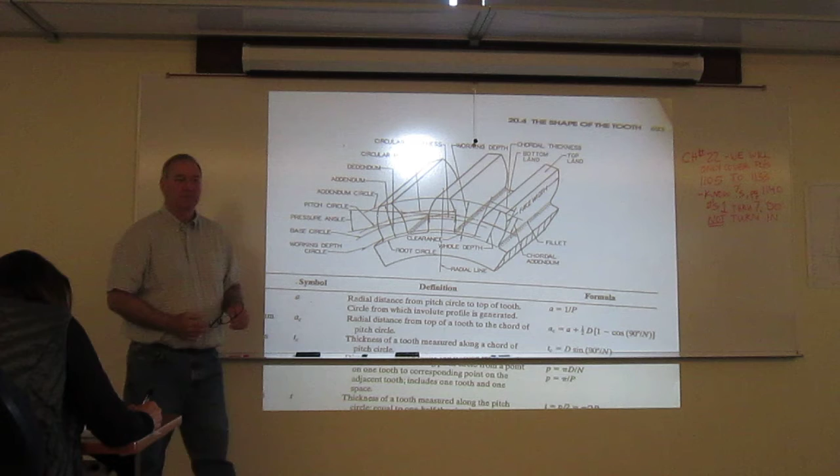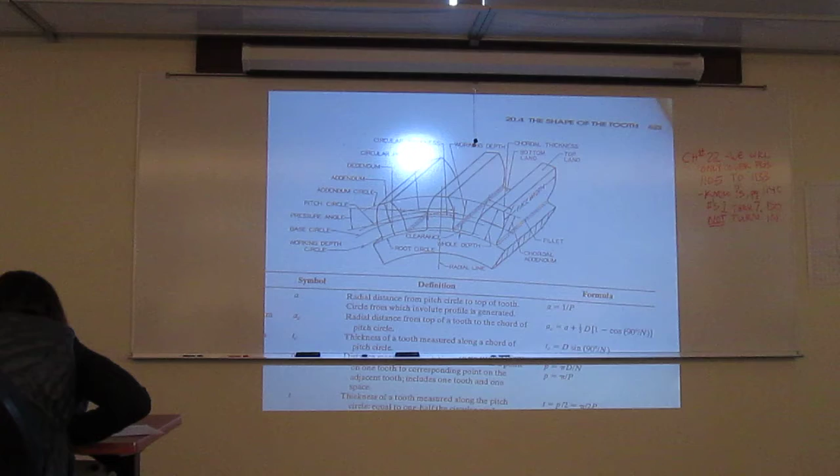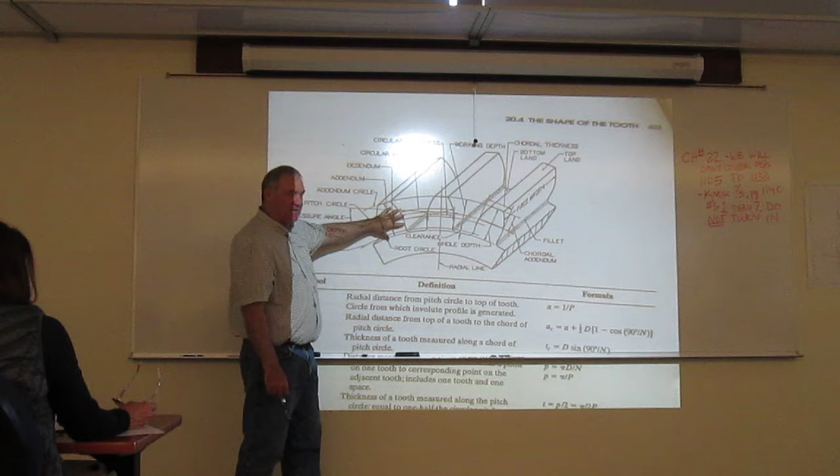Are tangent. The addendum's always the top half of that, the dedendum's the bottom. And the radial line, that's not something that matters? The radial line's just out of the center? No, but we will have to. When you draw the base circle, there's a linear section right here that matches on that radial line, and we'll use that. But it's going to be based on how many teeth are on the gear. So we're going to use that radial line, but again, it's not really going to be shown.

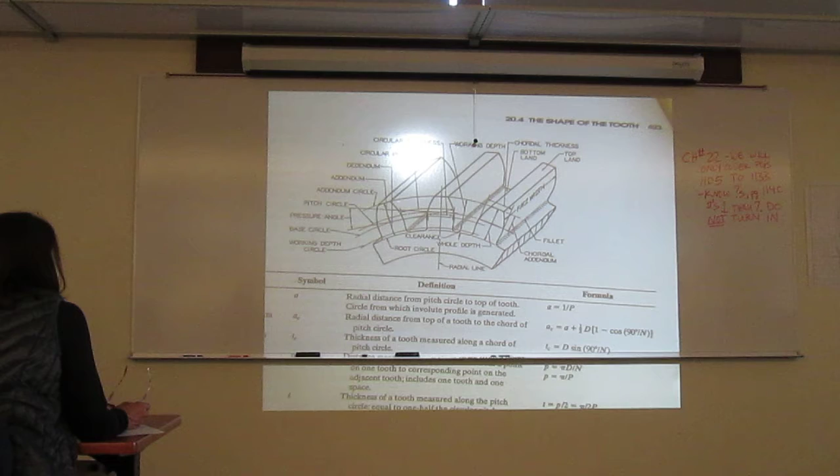So the part under the base circle is linear, and the part over the base circle, is that involute? Yep. That's correct. And in fact, that's why we're on that topic, because we're going to get ready to go there real quick. Let me kind of review. I'm going to use this as a lead-in. Any questions on that definition sheet before I leave it?

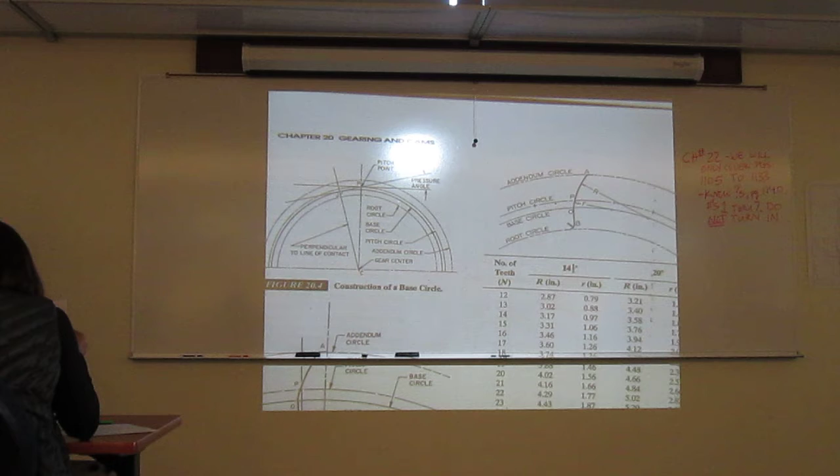Okay. This is in essence how we're going to draw it right here. This goes along with the example in the text. I just turned the page. I'm on page 624. So in essence, what we're going to do is we're going to lay out our pitch diameter right here. Okay, we know that dimension. What is that dimension on your sheet? Your pitch diameter. 4.167. We've got that.

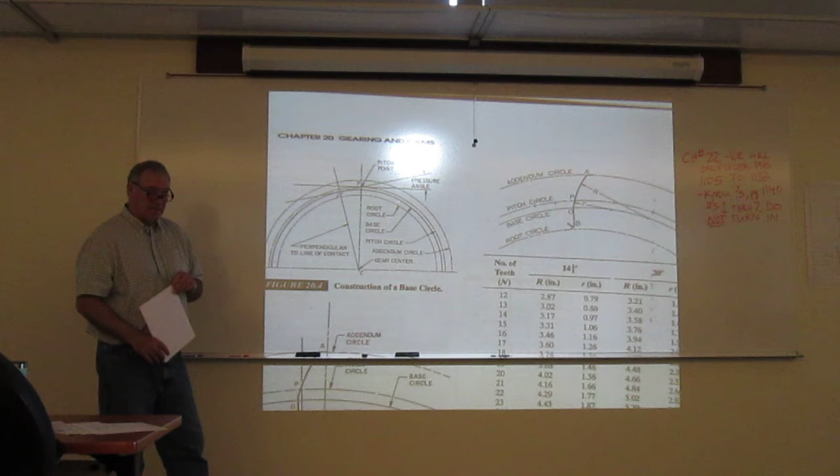Now, once we get that, and that's the center line, we're going to then offset for the addendum. What value is that? You see that on your deal where you calculate it? It's the fourth one down, 0.0833. Then we're going to offset for the dedendum. The dedendum's on page 2 of your deal. You're going to offset 0.0964, right? So when you're constructing the base circle, you start with the addendum? No, you start with the pitch. Offset for your addendum and dedendum.

Okay. Now, once we do that, then we've got to determine where the base circle goes. You're going to use the pressure angle for this. So we're going to find a point along the pitch diameter. And all we need is a tangent line. They've just done it right at the top because it's easy to draw. So we're going to draw a tangent horizontal line to the pitch diameter. Then we're going to take that line and rotate it our pressure angle. In the case of yours, off of the catalog, what's our pressure angle?

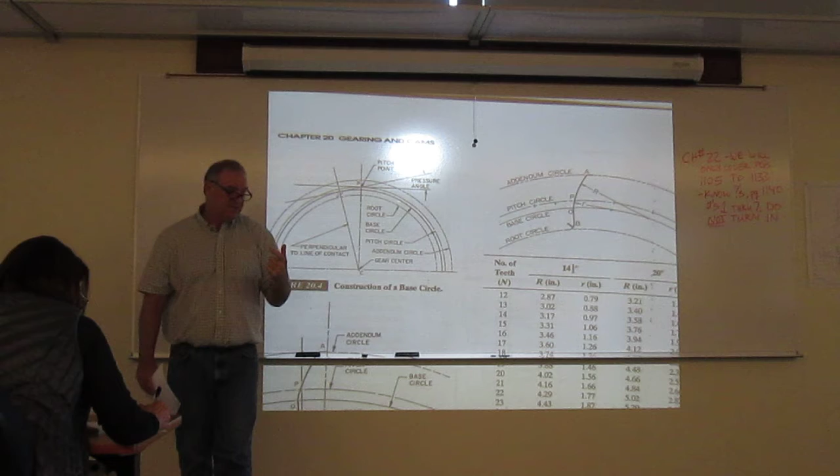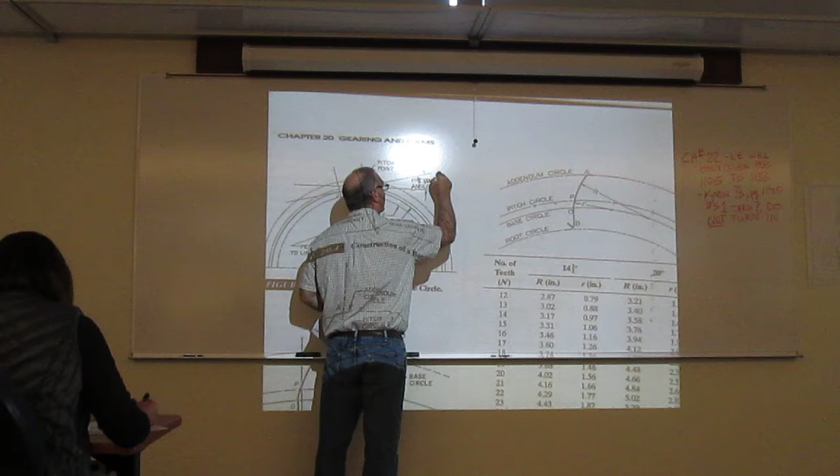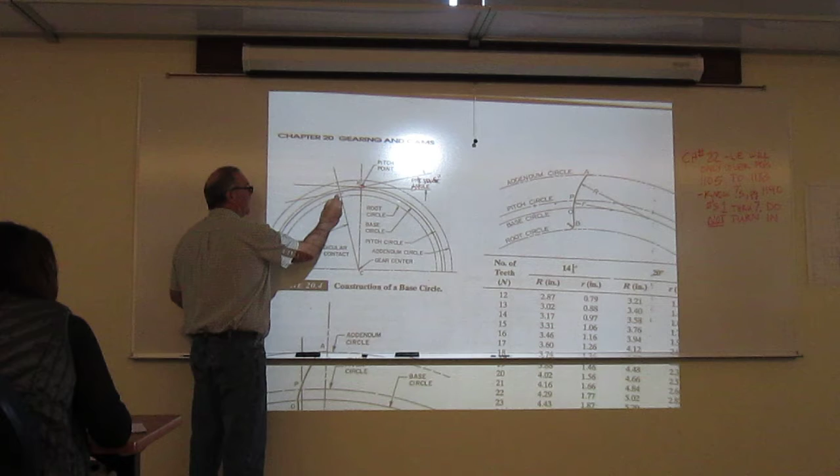14.5 degrees. So what we're then going to do is take this line right here and rotate it 14.5 degrees about that point. Now the base one that does the profile then comes from the center perpendicular to that line, and that's how you find the base, because that's the radius of it.

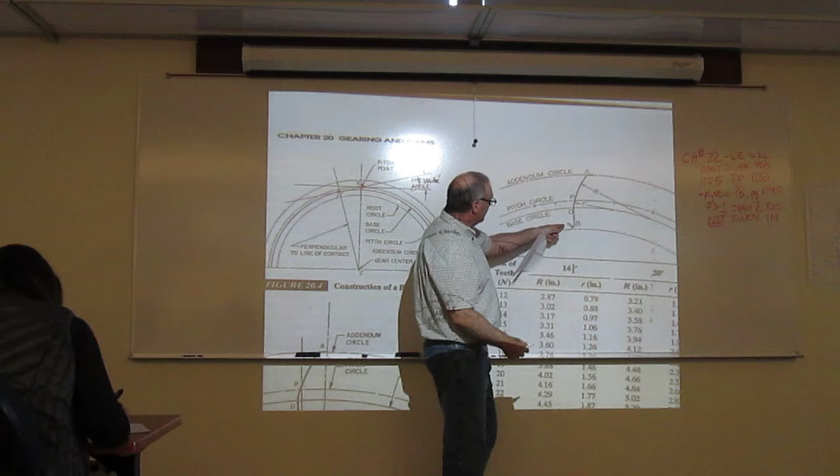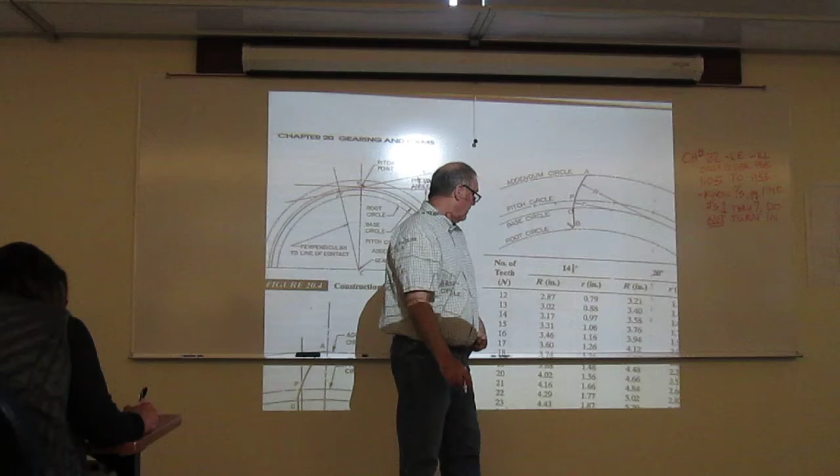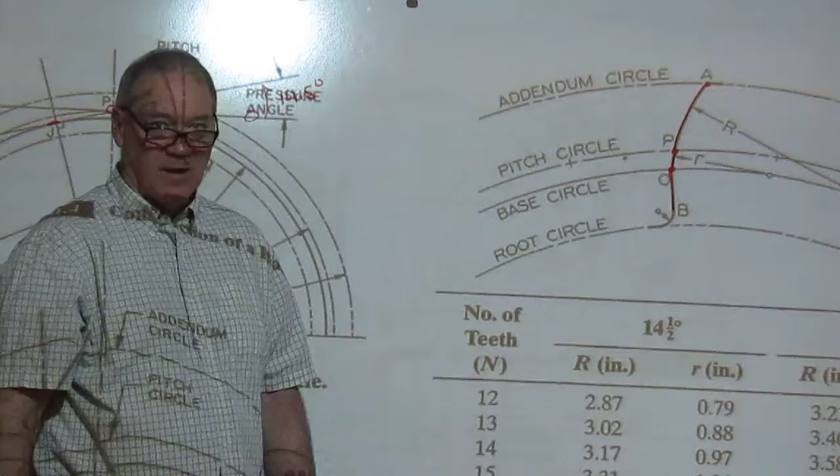Once you have the base circle, then we're going to come over and we come in. This is that straight section, that's that radial line. It's that line right there. That goes from the root to the base circle. Then we'll have little r, which will go right here. Big R, which then goes to the top to approximate that involute shape. So little r goes from the base circle to the pitch, and then from the pitch to the addendum is big R.

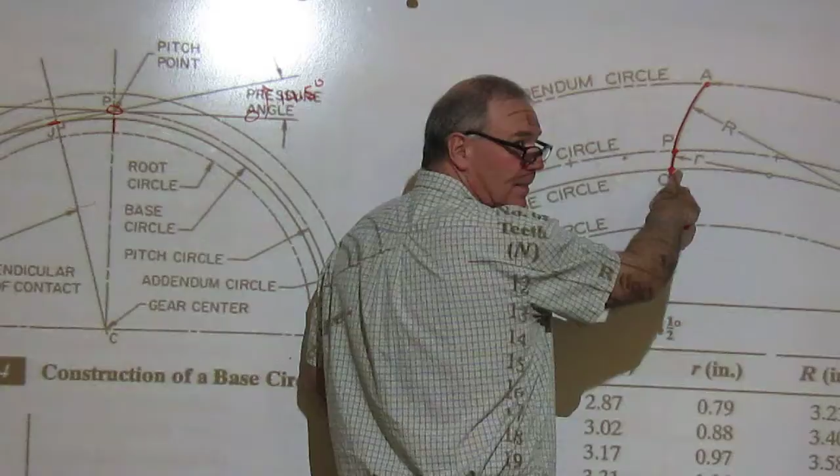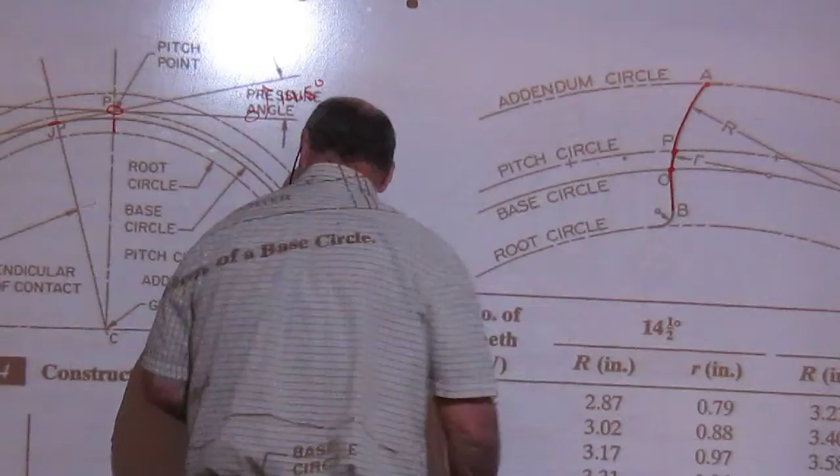How do you know where that is on the line? Well, we know we're coming up and we're hitting this spot. So you're going to start it right here. If I just take a circle and draw it equal to this radius, it'll cross this base somewhere. That's the center. And then just draw it back and keep that little section. So how do you know where to start that? Based on the number of teeth. We'll get there. Is the angle between big R and little r still 14.5? Nope. No, it is not.

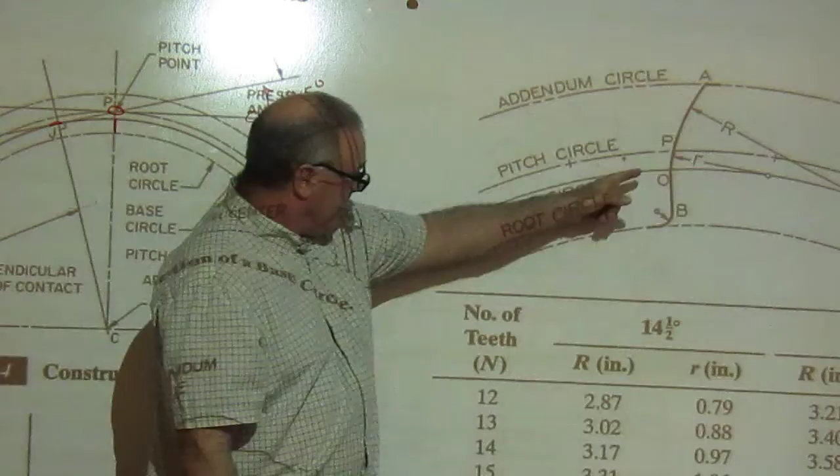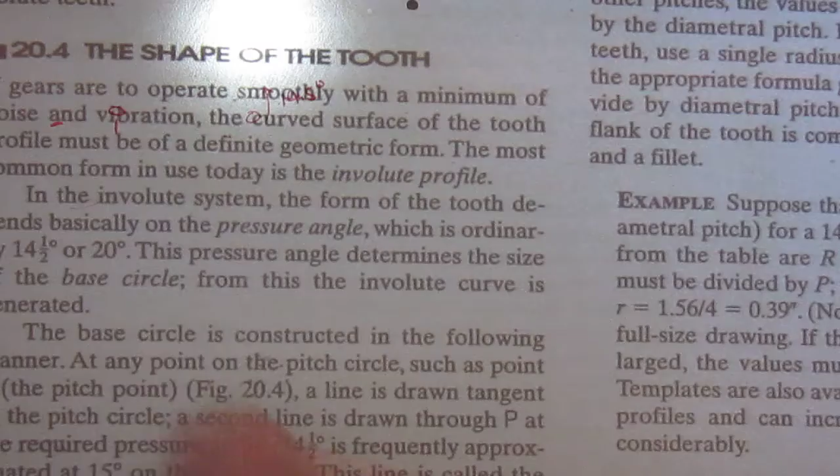Now there's one other little trick to this, and I want to explain it here first, and then when we get to it, we'll explain it again. When you get little r and big R, you're getting them off of the odontograph down here. Okay? Now, one thing that's buried in the instructions of this, when you're doing these, on your handout, starting here on section 20.4, page 622, the shape of the tooth.

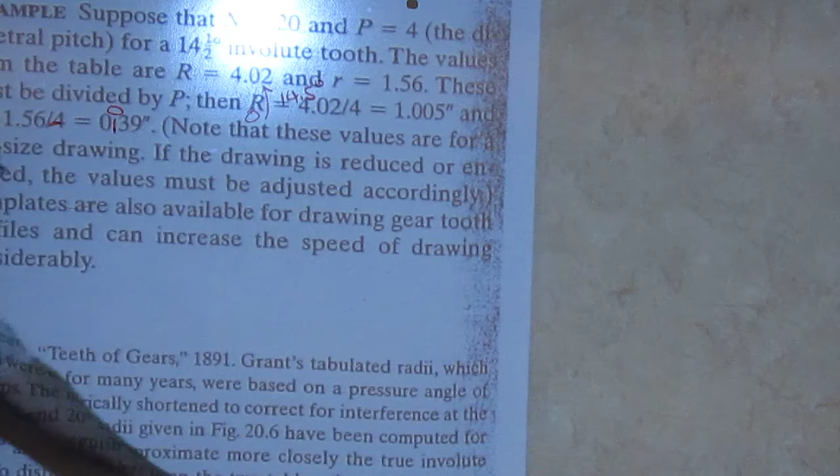So they're basically coming through and they're telling you to draw all these circles. Over here, there's an example right here on how to use Wellman's odontograph. And it's kind of buried in here. But there's an important section. Okay. Right here.

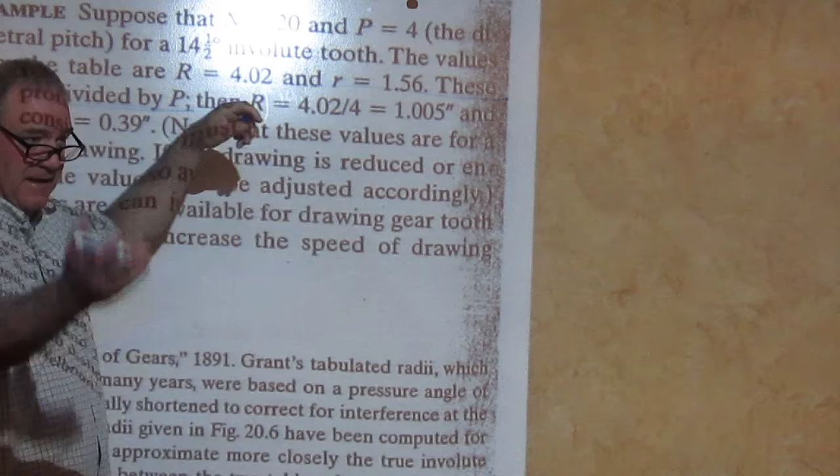Okay. So for this example with 20 teeth, they said R is 4.02, little r is 1.56. And that's right off the chart. But this is the only place they tell you: you have to take this for a full-scale drawing and divide it by large P. What's large P? Pitch.

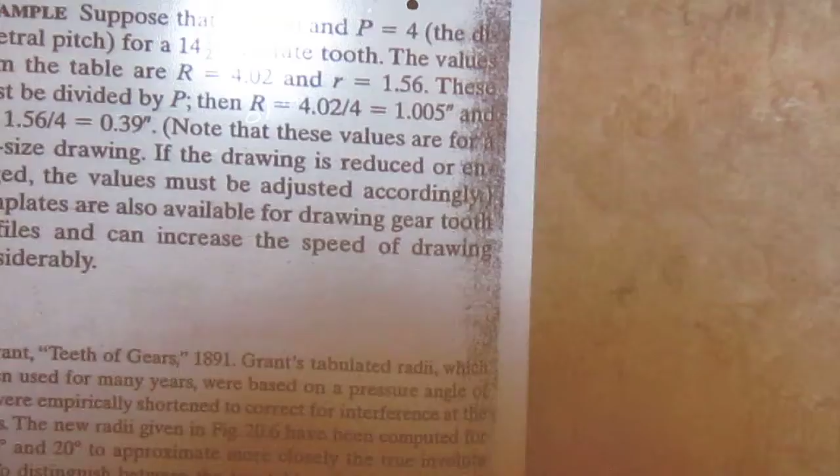Now, here's my goal on this: I want to draw both gears, not to completion today, but get them started. I want to go through and draw the spur first. As soon as we're done doing it, what I would like you to do is maybe try and redraw it on your own once or twice, so that it's stuck there.

Okay. We'll give you about an hour, hour and a half break, and then we're going to pick back up probably about 11, and we'll draw the worm gear. And again, this afternoon, maybe you can practice on it. Now, we may push that back depending on how time goes, and only do one today and the other tomorrow. We'll see. All right, let's go to CAD, and let's draw this thing.

Did everybody use your 2020 now? No. We need to find a time to go through and reset all our basics. Do you guys want to take time to do that? So you're using 2020? Well, I'm in 2020, it won't let me open 2019. Oh, really? Yeah. All my stuff opens just fine. They kicked me out earlier this week and it won't. Yeah.

So can you have one drawing that you flip-flop back between 2020 and 2019? I haven't looked at it yet if they changed that. We'll find a day very shortly where we go through and reset all our paper space and our operating units and all that stuff. We probably forgot how to do it. It'd be a good little review. It actually fits in quite well with our next course, customizing AutoCAD.

Okay, so let's start with the blank screen. You're going to be on a C template, so you might want to start that. First thing you want is a cross that you're going to build this around. So this is going to be the center of your gear.

Now we have some established views, so I'm going to zip off this real quick just to remind you. In your handout on page 627, this is really an established view for gears, and that's why we're going to duplicate it. We've got our spur gear, which sits on a shaft, and there's a hub that sits on here. You can see the hub right here. Our gear is identical to this, but I don't think we have the front hub. We got the back hub. I can't remember. It's on the catalog.

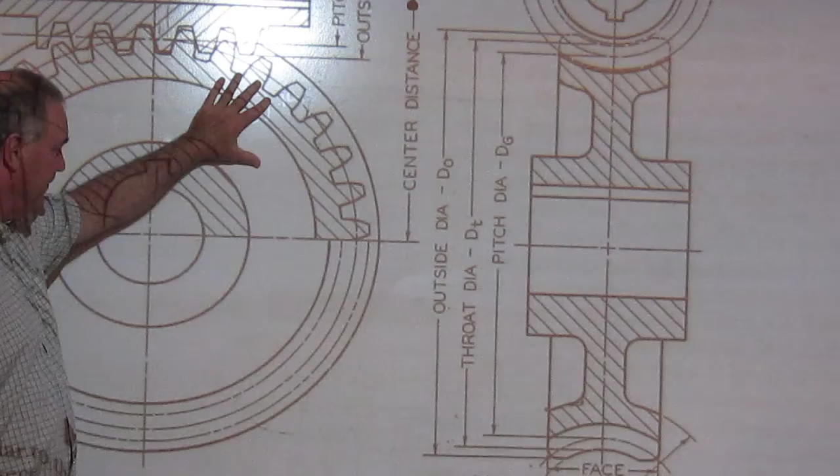So in essence, we're going to draw the gear profile in a half section on top, ANSI simplified section on the bottom. Now, why is this inside this bold line right here? Does anybody know why that is? There's this bold outside section that goes all the way around this gear. That's because that's what you're seeing behind. Remember we talked about this thing being dished? Oh, yes. Okay, so we've got that dish right there. We're going to draw everything right in the center of this.

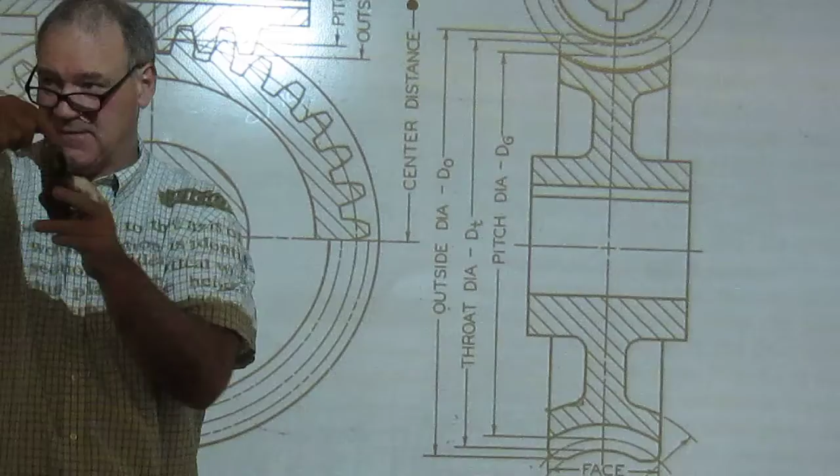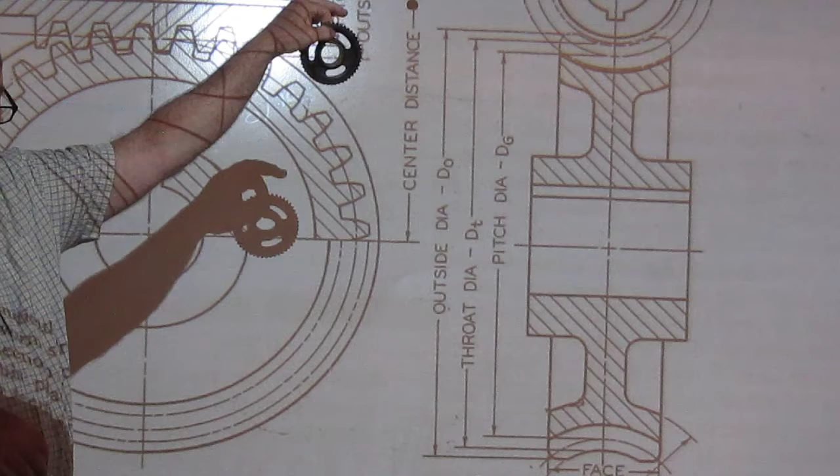Why doesn't the section go all the way through then? Because it's a half section. You mean stops here and doesn't go this way? No, I mean, it should be in the middle. There's only two rings where it's sectioned, and it shouldn't be the whole thing if it's in the middle. Here and here. Yes. What's the thin part in the middle? The web, right? We do not section webs if they give a false sense of mass. So yeah, we're cutting through the web here, right in the middle of it, but it's very, very thin. Remember all those rules we had back with sectioning?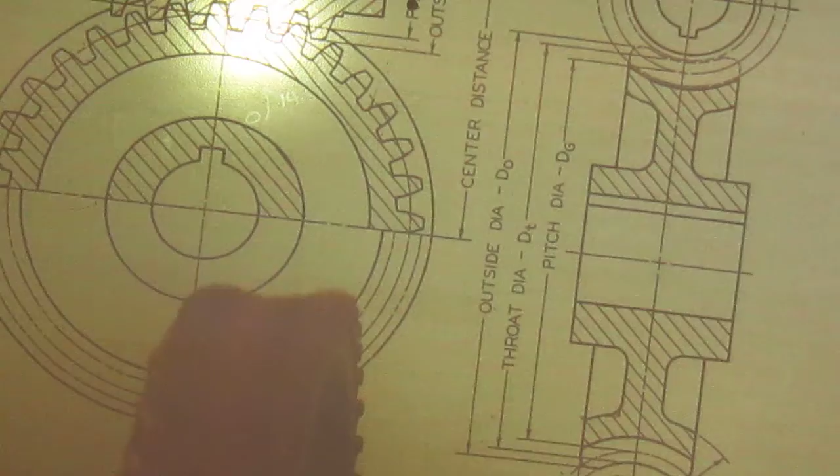Can you put the gear under the light so you can see it? Okay, so we're drawing everything. So here you can see the dish quite well. We're drawing everything right on the middle. That line that's on the outside of this, that's this line you're seeing here in the background, that thick, bold object line.

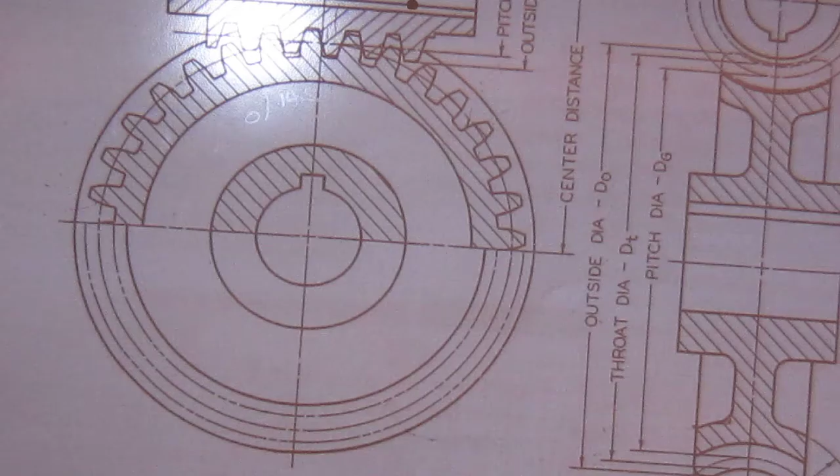Okay. So we're going to do all the profiles on the throat because that's where everything happens. And then you'll just see that outside in the background. Okay? So don't let that confuse you. That's kind of why I wanted to go over that. But the question,

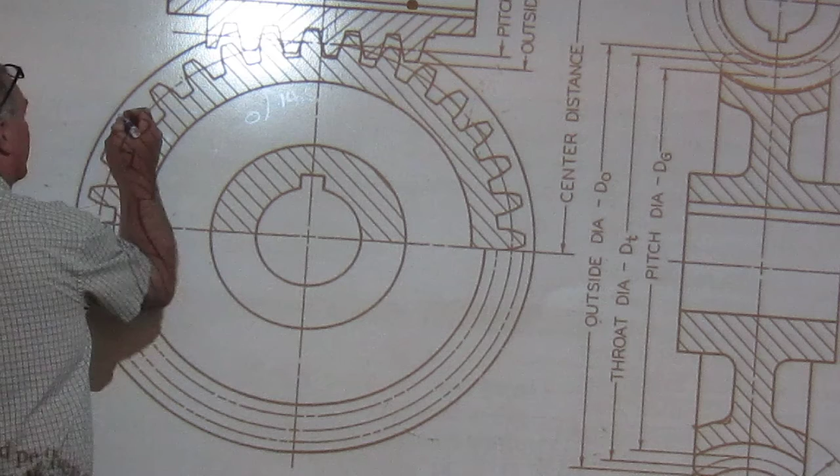The outline in the background isn't a circle, isn't it still? Yeah, but we're just going to draw a solid line on it, because we're showing the throat profile. Yes, because really, if we're looking and we saw this, what we'd see is this go like that, right? Exactly, yeah. As we saw it curve into the back. Okay. But that leaves a misleading view, so.

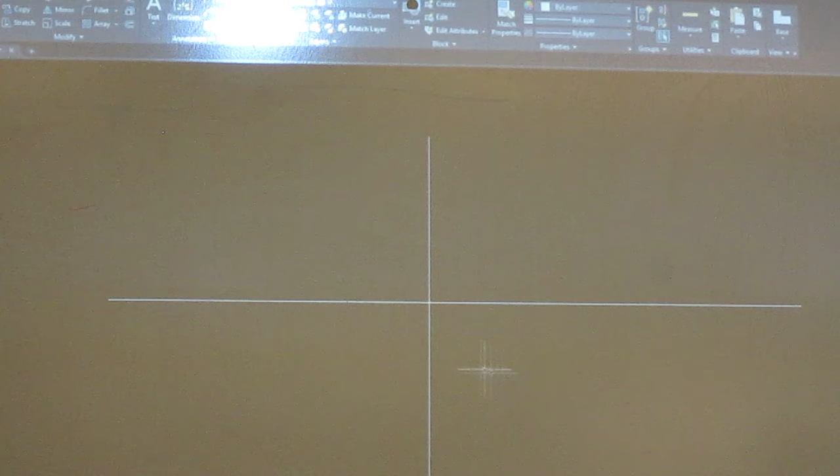Okay, so this is where we're going. All right, so everybody's got horizontal, vertical line. We need to draw the pitch diameter. So I'm going to put a circle in here. My pitch diameter. Make sure you use the D signification. Because you don't want a circle with a radius of 4.167. You want a circle with a diameter of 4.167.

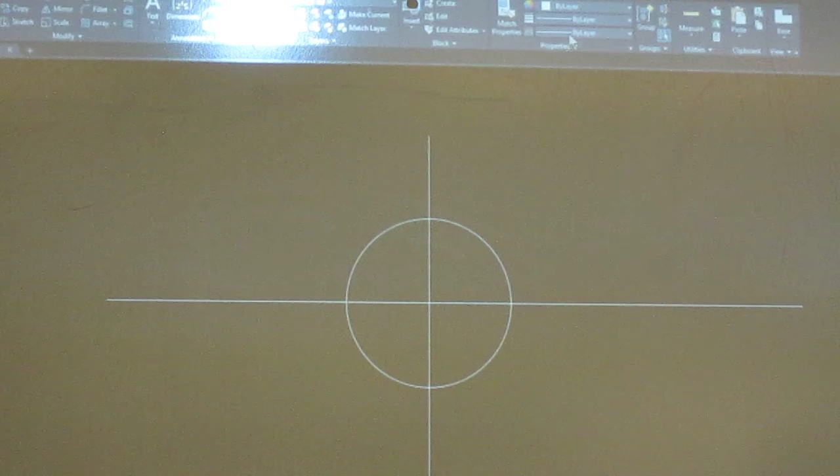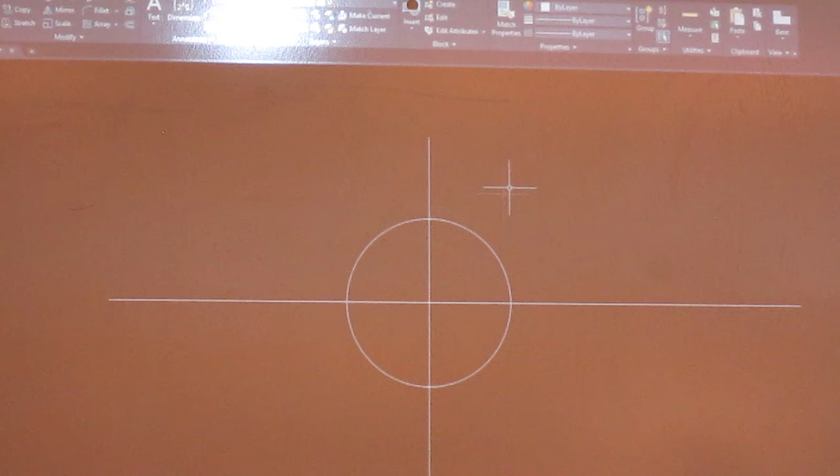I'm going to load a couple line types up here. And I want my phantom line too. Okay, I'm going to leave all my stuff white and I'll try and use line types, but you can change it to whatever color you want. Okay, so my pitch diameter, I like them to be center lines.

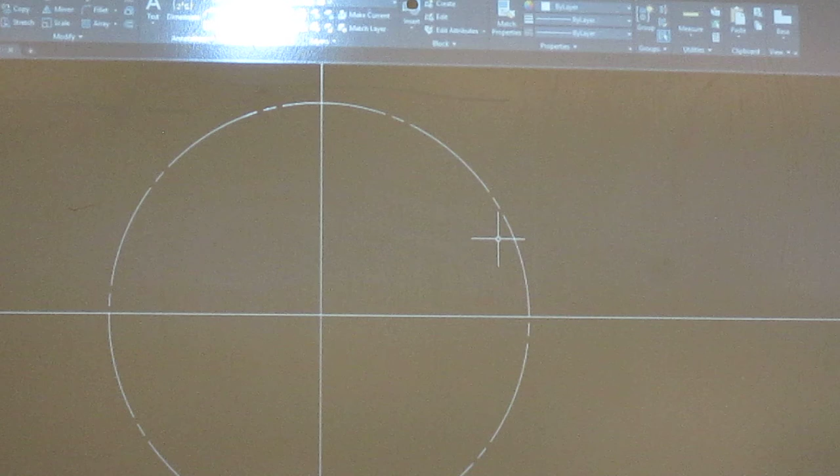Okay, let's offset now for the addendum and dedendum circles. You could go ahead and redo a circle and calculate these as the pitch plus 2 times the addendum is one, pitch minus 2 times the dedendum is the other. Or you can just do the offset command. So I'll do an offset of 0.0833, and that goes out, and 0.0964 goes in.

And if you wish to, these two will be phantom lines on the bottom part of the drawing. So you should kind of be looking here, where you should have phantom for the root circle, center line for the pitch diameter, phantom for the addendum. We good so far?

Okay. Next thing we want to do is lay out where the tooth is going to occur. Now, a couple of you asked this question, and I said we're going to do it based on the teeth. Here's the point where we're going to do it. Okay, we're on the spur gear. I've got a radial line that comes up here. And in essence, if you look at the diagrams on 624, you'll see that the edge of the tooth comes up into the base circle.

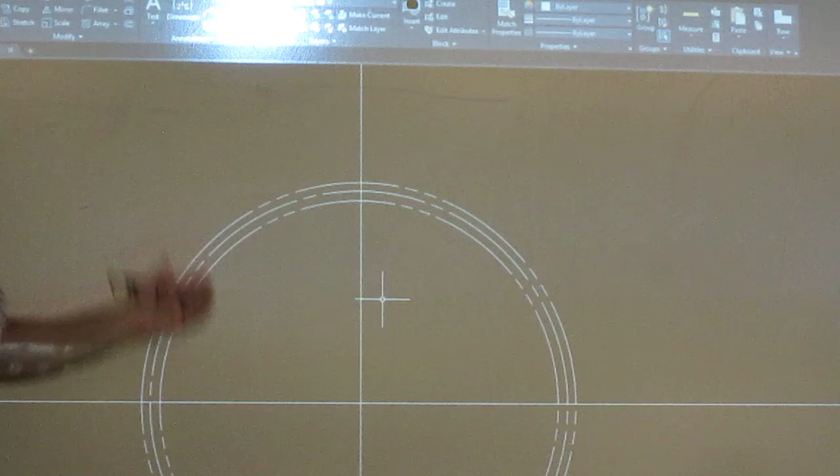But how many teeth are on the spur gear? Okay, so does it make sense that really we've got to lay off 100 spaces? Because it's got 50 teeth, that also means we need to have a tooth come in between all those other 50. So we've really got 100 spaces. Because as you look at it, I've got a gear tooth. Oh, you're saying you have the 50 teeth and 50 spaces.

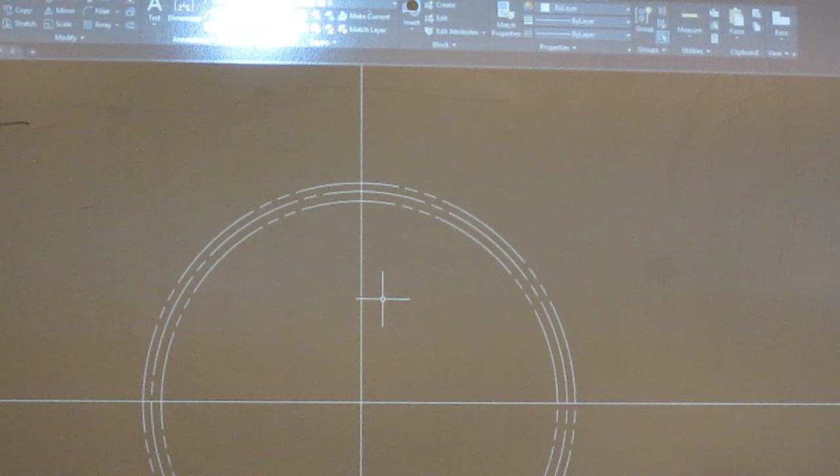That's right. Because when we're looking at it, we're going to have a gear tooth that comes something like this. Now there's going to be another one over here that does this, right? Okay. So really we've got one tooth, there's going to be 50 of these on the spur. There's going to be 50 coming into it, so we've really got 100 spaces for teeth here.

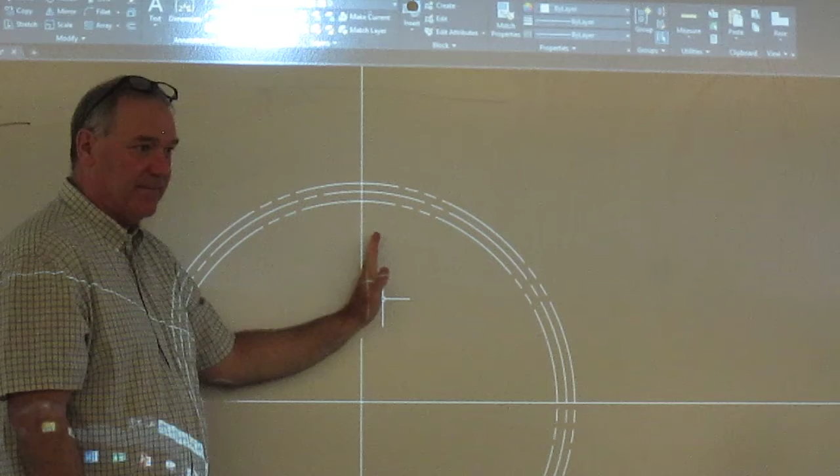Okay. So therefore, when we take this, what's the angle from here to the side of that tooth? 3.6 degrees. And you can just array that line 100 times if you want. We're only going to need a couple of them. But the angle is 3.6 degrees. So I'm just going to copy. Wait, repeat that, sorry. The number of teeth is 50. Yeah. Okay? And, well, let me kind of show you.

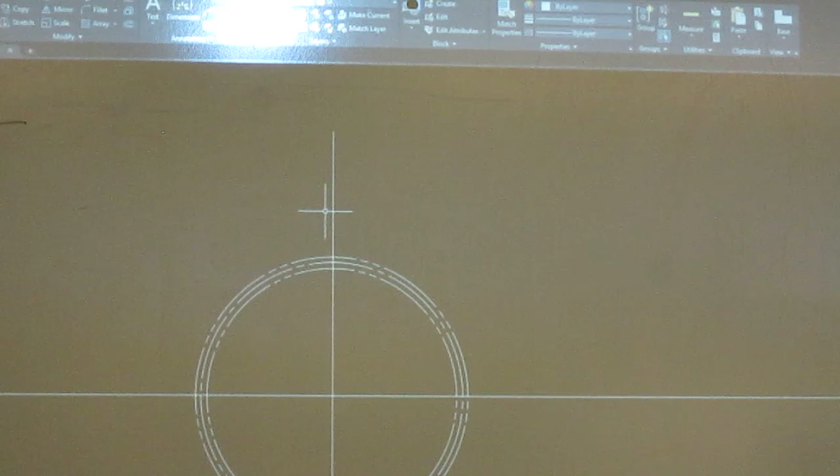No, I just read it in here this morning. Where is it? Okay, it's on page 624 of your handout. Very top paragraph on the left. I'm following the example here. The teeth may be spaced around the periphery by laying off equal angles. Okay.

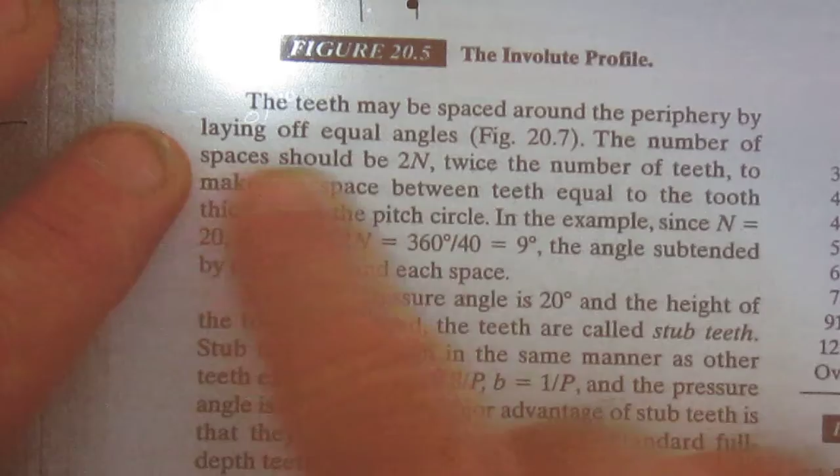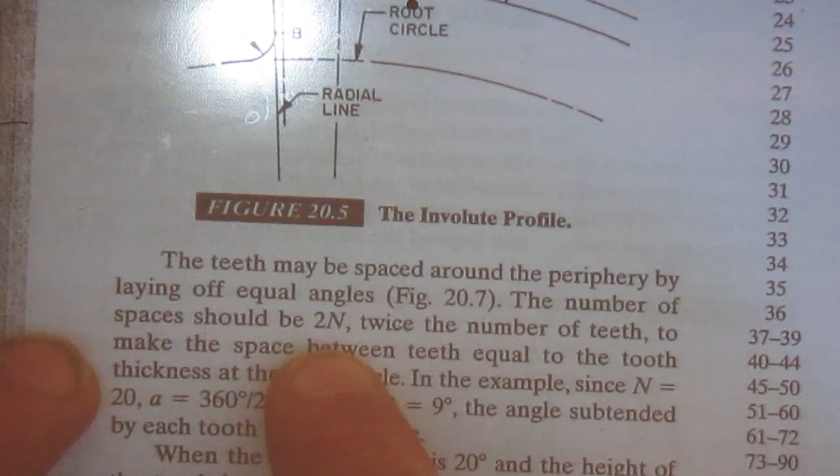So I'm on page 624 of the handout. They're talking about the radial line. The number of spaces should be 2 times n, where n is the number of teeth. So we've got 2 times that. So I took 50 teeth from the spur gear, times it by 2, that's 100. Divide that into 360, leaves 3.6 degrees for each tooth. Does that make sense? Yes.

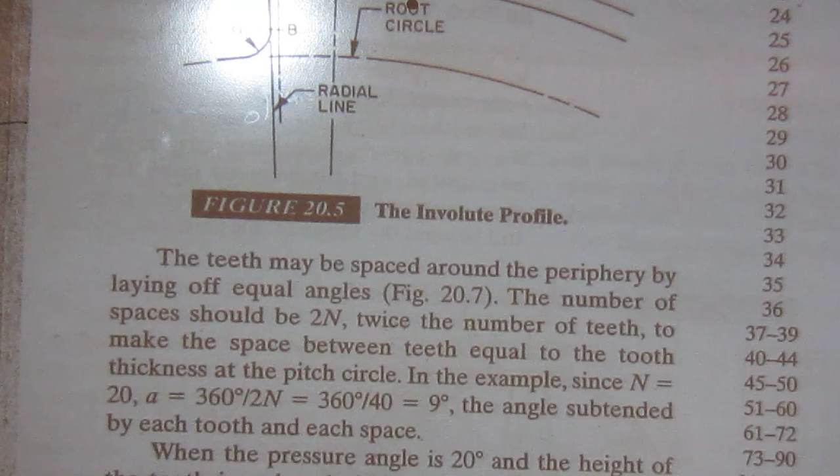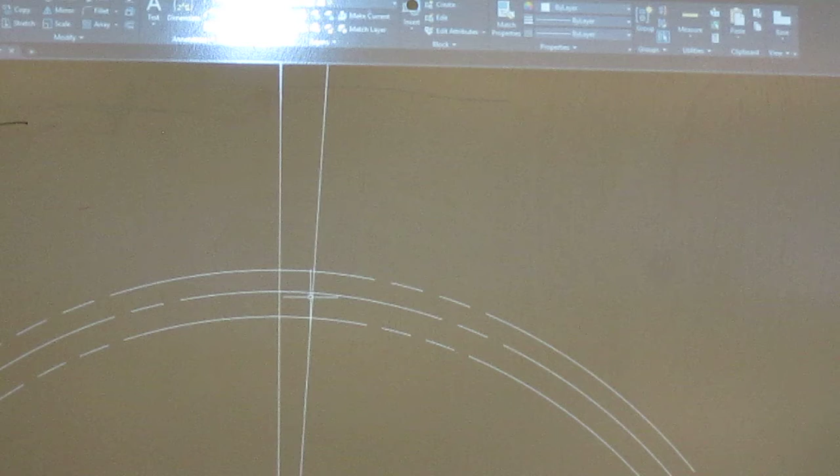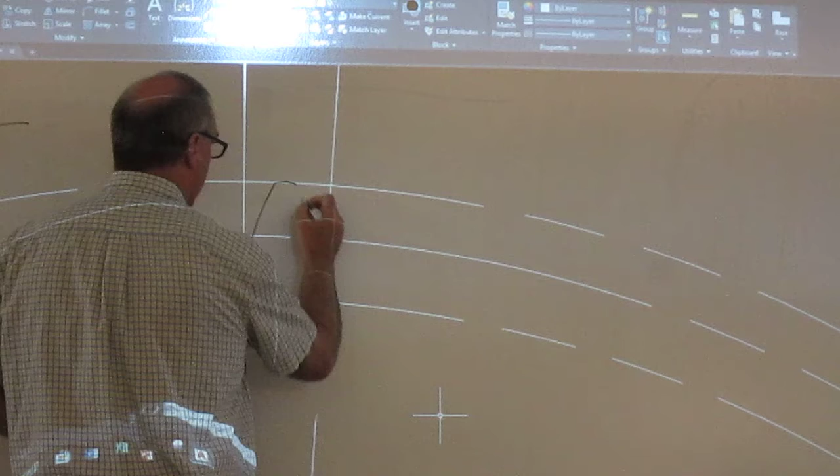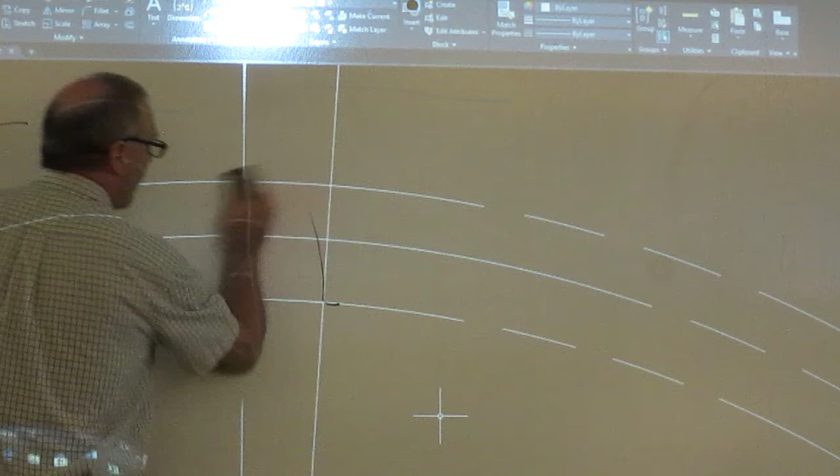Okay. So I'm just going to copy, you can do it however you want, you can use array or whatever, I'm just going to copy this right on top of itself and then rotate one of them about the center and I'll go minus 3.6. So I've got these 2 lines. So my tooth is going to look like this. Just like that, when I'm done with it. Okay, we now got the edges of the teeth.

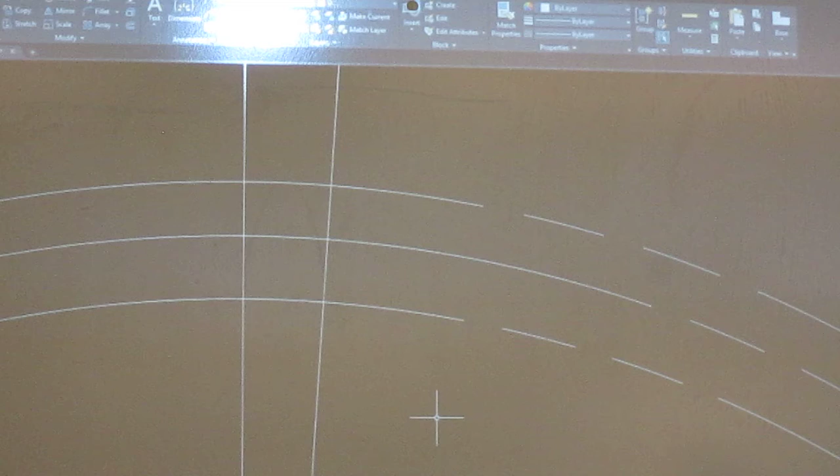Now I'm going to move to the base circle, and this is explained on page 622 but it goes with figure 20.4 in your handout. So if you look at figure 20.4, what we need here to get our base circle is we need a line. So I'm going to come off this one that's right off the pitch diameter here, and I'm just going to draw myself a horizontal line. Make sure it's horizontal.

And I'm just going to move it in. So it should be off of the pitch diameter. So we need a line tangent, so this right onto that pitch diameter. Okay, y'all good?

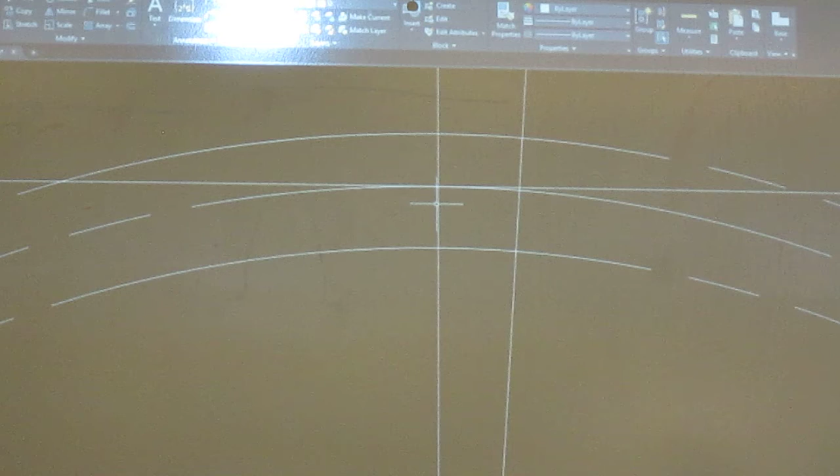All right, now the next thing we want to do is we want to rotate this for the pressure angle, because we're going to find the base circle here. So I'm going to use the rotate command. If you'll just watch me for a second. Okay? Because it's important that you rotate and use your base point right here on the pitch. So I'm going to do a rotate on my horizontal line about the pitch diameter. So it's rotating right about there.

And in this case, I'm going to rotate it at 14.5 degrees. Okay? Because that's the pressure angle of this tooth. So go ahead and rotate that. Okay, everybody's got that? Now you're ready now to make the base circle.

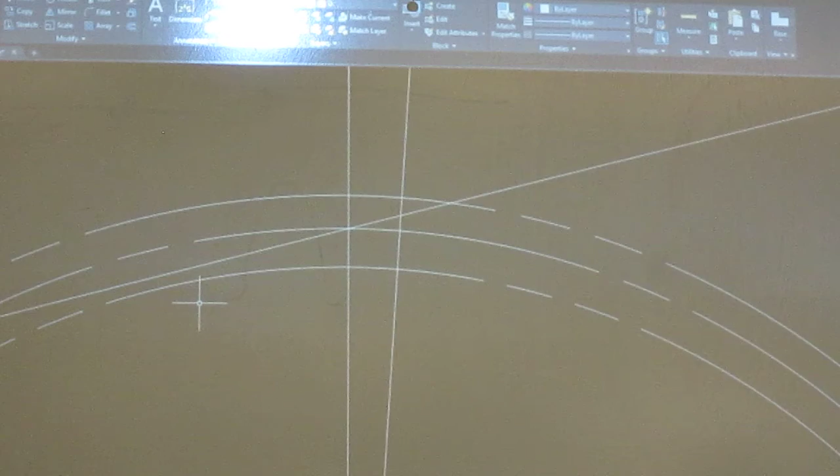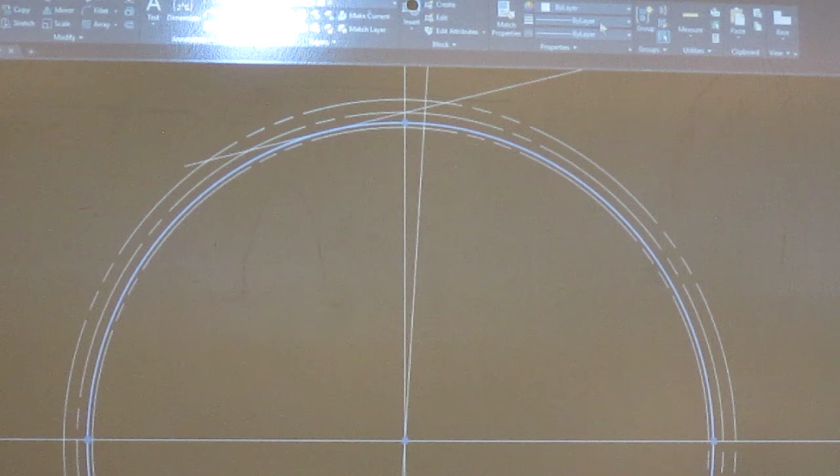The base circle has a radius equal to the radius from the center of your gear perpendicular to your rotated pressure angle. So I'm just going to do a circle. I'm going to come from the center of my gear and use my perpendicular snap to go perpendicular to that line. So let me change the color of this. Okay, so I made it my yellow line, so you can kind of see it right here.

You want it perpendicular with what? To your rotated pressure angle. Just like is shown in figure 20.4.